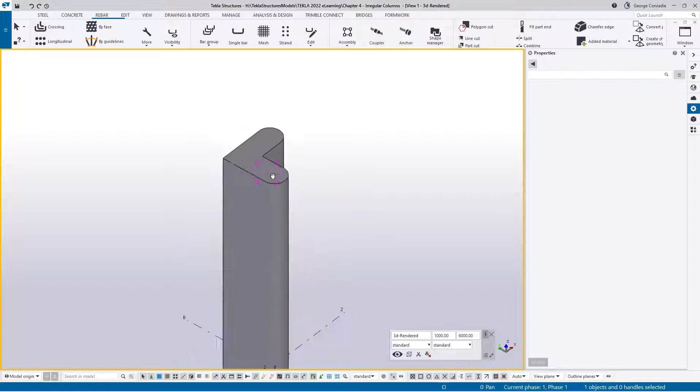In this video, I'd like to look at an L-shaped column, and the L-shaped column has got a bit of a circular shape to it. If we go to the top view, we can see that we've got a perfect end circle there and end circle there. So we can have a look at how we can detail this column.

So what I want to do before we start, we'll just get a little bit of a sketch here as per usual. And what the engineer is asking for, again, it looks like we've got N12s at 300 ligatures around, and then he's got L bars closing the gaps, from the outside to the inside, and from the inside here to the outside, and then he's got an L just wrapping around the outside, which are also N12s at

300. And then the main vertical bars, he's got a row of 5 bars here, 5 N24s. He's got 4 N24s on that side, obviously because we already have one in the corner. And then around the arch here, he's got 3 N24s, and it's similar here, 3 N24s. Again, we've got the traditional extension by 500 with a cog at top and bottom, and a crank lap at whatever level we can make, 1.5, 2 meters. All right, so knowing that, let's see how we can detail that column.

Now, also with this column, I'd like to show, let me just bring this back, in terms of this circular bar here, which really has a leg, a straight leg. It's got a perfect arch and another straight leg, and this perfect arch has got the leg length in the middle there should be 0 because it should be a perfect half circle. So let's see how we can achieve that.

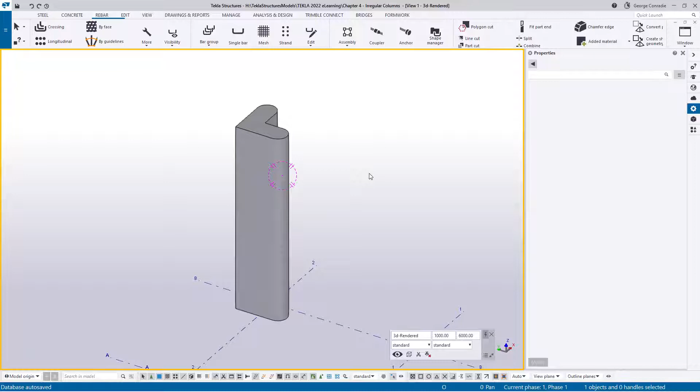And what I want to do is I want to show 2 methods. The one is I want to show how we do that with rebar groups, and then I want to show the other one as a rebar set and show that we can achieve exactly the same result. So they show up as a single line in the bending schedule with the same shape code, although they would detail 2 different methods. So that is the aim.

So when we head over to our level 0, which is at the bottom, I'll make sure we're in transparency mode. What I'll do is, as a starter, I'll do this one as a rebar group, and I'll do this one as a rebar set, and we see how they compare. Okay, so in our rebar tab, we go to rebar group. So we go to normal rebar group, and then let's go and look at settings.

So with that, what I'm going to do is I'm going to start drawing the bar. So first it asks for the part to reinforce. I'll pick the part and then take also the shape of the bar. Now, I need to get to a point on this side. So what I like to do to start, I want to start there and work my way around here. So that's going to be the first leg around here, and that's going to be the last leg.

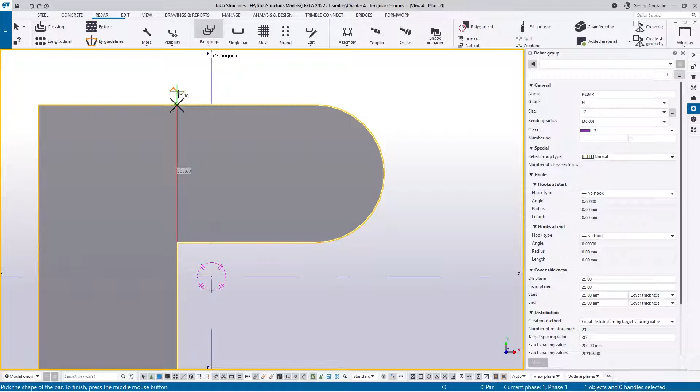So I start on this corner, but I'm holding my control key as a temporary snap. And then when I hover over to the other side and I accept a point there, you can see that's a red line, which implies that Tekla didn't see that as a leg. The physical start point is here now. And then if I hover and I just pull, make sure that you are in the ortho mode, you can see the 90-degree and the red coming up from the red axis.

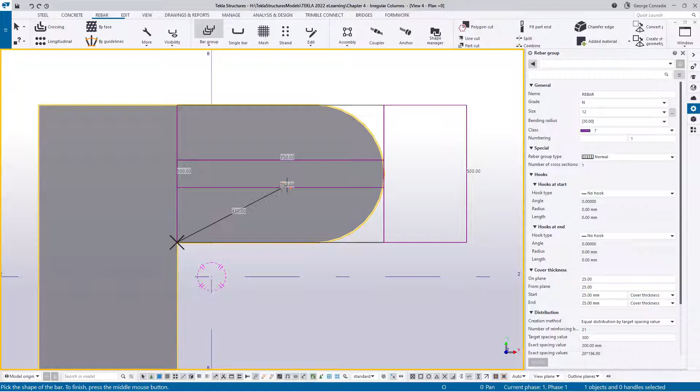I know that this length of this wall is 750. I can click, and I also know the width on this wall is 500. Click, and then back to our endpoint here. And once we're there, we can accept the shape. And now if I just tilt it over a bit, it's asking for a range.

So the start of the range, again, I like to start at the bottom and end at the top. With that, Tekla creates a U-bar that looks as follows. Now, if we look at this bar, we need to try and get around this concrete.

If we click on this bar, we can see Tekla's got a bending radius of 30 millimeters, and that applies to these 2 corners. Because there's only one value here, this field could be a list field, since there can be multiple values for every corner. But because there's only one value, Tekla applies that to all the corners.

Now, where does the 30 come from? If we go to our rebar catalog, it's this value specified in our rebar database, so it's picking up this value. If we had a tie or a stirrup, the radius would be slightly smaller.

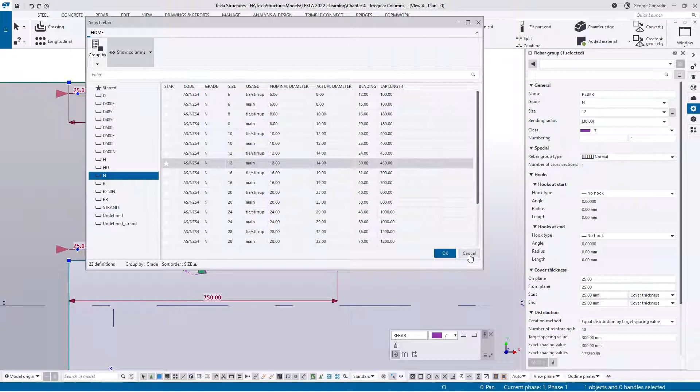Okay, so with that in mind, we know now that we can manipulate these radiuses. Now we've got to apply a radius such that we end up with a zero length leg. At the moment, if we look at this bar, if I just go click on there and go to the shape manager quickly.

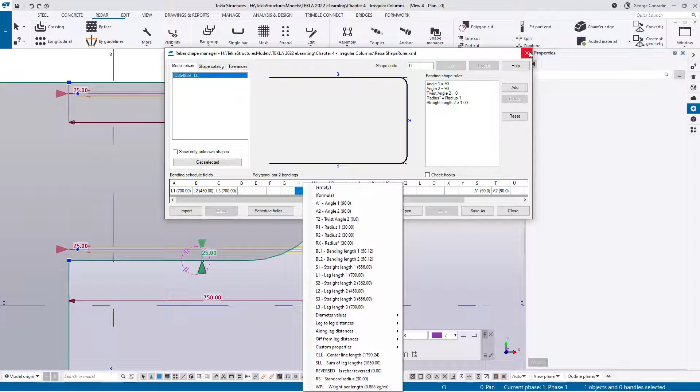If we click on this bar, we can see that leg 2 as it is there now. If I just go to short leg S2 straight length, there's a value there. So our aim is to hit a zero value there. So how do we work this out?

Now for that, I am going to call up my calculator so we can see how this is done. So what we know is, if I take a dimension from this end to this end and place it there, and also select the bar to see the other dimensions.

We know that we've got a concrete dimension of 500, and we also know that we've got a 25 cover top, 25 cover bottom. So those two together is 50. So if I minus 50, I've got 450. That is from the outside of this leg to the outside of this leg.

Now we also know from the catalog, although this is an N12 bar, the actual diameter is 14. So if we minus 14 for the leg on top, and minus 14 for the leg at the bottom, we end up at 422 millimeters, which is the dimension from the inside of this leg to the inside of that leg.

Now the radius would just be half of that. So if we divide by 2, we end up with a value of 211. Now what I will do is click on the bar, and in the bend radius, I'll replace that with a value of 211. And if I do that, Tekla then generates this perfectly shaped U for us.

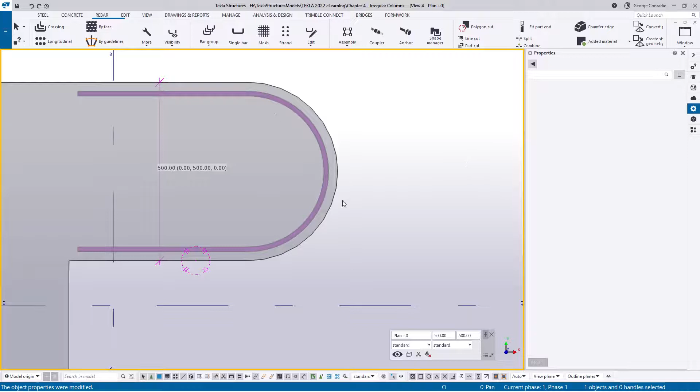And if we then click here and head over to our shape manager again, you can see it's now picked up a different shape that looks like this. And if we right click in our values here and look at our S2 value, we can see we've hit a perfect zero here, which implies this is a perfect half circle or arch with no straight length there.

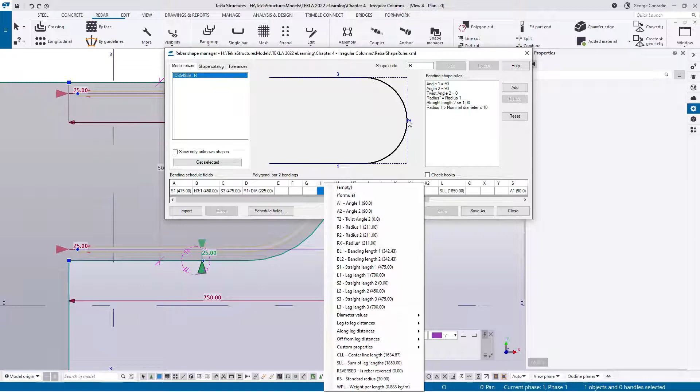And that's exactly what we try to achieve here. Also, because I started on this corner and I've got a start and end value of 25, I've got to try and hit that same leg length with our rebar sets now.

If we click on that bar and inquire the bar itself, you can see we're aiming for a 475 leg, which is the A dimension. And we've got a C dimension of 475, which is the bottom straight length. And then the 450 is the B dimension, which is from the outside here to the outside on top.

And then our radius is 211. Our outside radius to the outside of the bar is then 225. But I mean, you can define these shapes any which way you want.

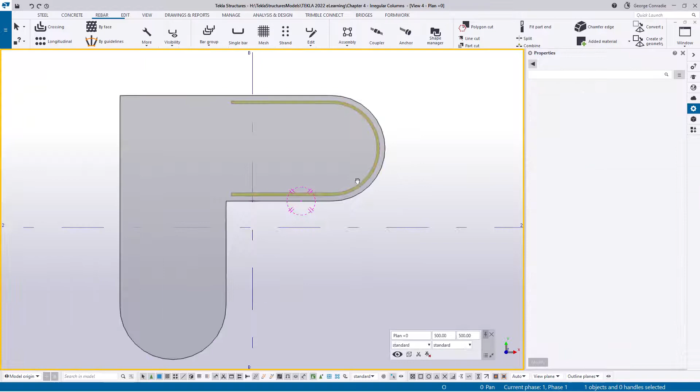Okay, so let's try and recreate this. But before we do, let's just look at our spacing quickly so that we can actually use it in the final result.

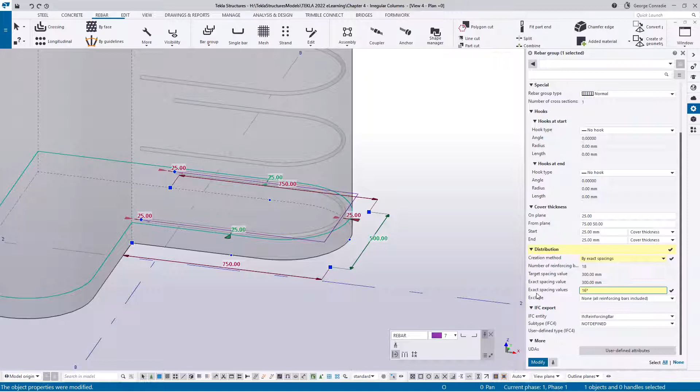So if I click here and go to our property pane again, we can say the from plane, which is the gap at the bottom and the gap at the top. We want 75 on the bottom traditionally and 50 on top, and we'll accept that. Then for our spacing, we go to an exact spacing, and we know from previous videos that we can use 16 at 300. If I enter that, we're back to our usual set out of 17 bars spaced exactly at 300. We've got a 75 at the bottom and a 75 at the top, although we've only asked to cover 50. Okay, now that sort of wraps up the rebar group.

So if we just click on the concrete column, right click and inquire the cast unit, what we now see, if we scroll down a bit, is we've got our bending schedule with a single line in it, and that single line calls up an R-shaped bar, and it also calls up 17 of them. So let's see how we can deal with that in rebar sets.

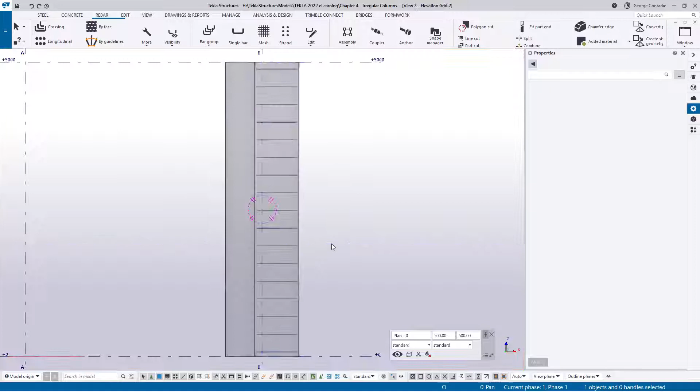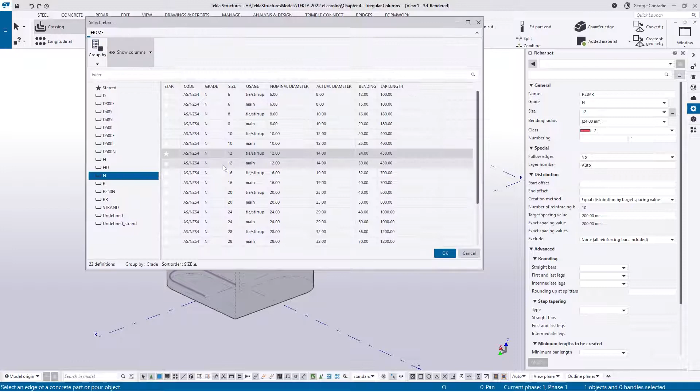So let's go back to our rendered view, which is this one. I'll make it transparent and redraw to make sure we get the right color. If we now go to a crossing bar, and head over to our property pane, we can then say, because I can see from the 24 it's got the wrong value, so if I hit that I'll say N12 as a main bar, because I'm looking for the 30, and then our color will go back to our traditional 5.

And then the rest of the values, except for the 300 target spacing, I'll pick. And then if I hover over this edge, what I'm going to do now is, instead of accepting all of it, I'm going to start, I want to accept that one, and I want to accept this one. And then what I can do is just pull this back a little bit, just to somewhere, and then say OK. And that will then give us the rebar sets in the same way.

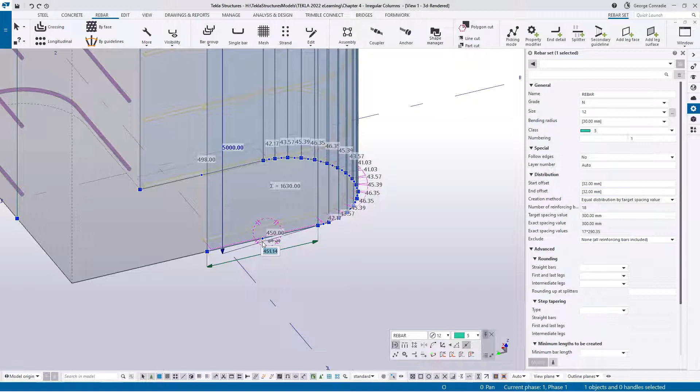And now the next thing we want to do is make sure our leg lengths are correct. An easy way to do that is you can see the face here is 450. We need to take this value and measure it from the correct side, this side. We want to make that 475 mils. And then we want to do the same on the other side, so this 500, we want to make 475. Now those bars will have exactly the same leg lengths.

Now all we need to do is look at the spacing vertically. So we know we want to start 75 at the bottom, and we also want to stop 50 at the top. Our creation method, we want to do the exact spacing again, and for the exact spacing values, it's 16 at 300. We can just say okay, we're happy with that. Now that generates exactly the same set.

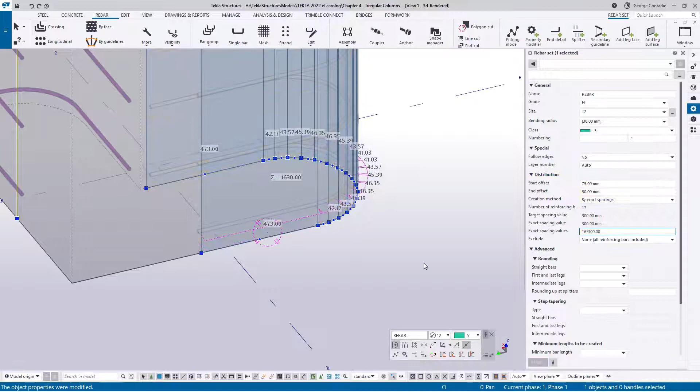Now, if we look at this bar, I'm going to click this rebar set, just to confirm it's a rebar set. And I'll switch off the visibility of the leg faces there. Then what I'll do is head over to the rebar shape manager, and it's picked up an R bar. But the difference here is we've got an arc there. You see this little green 2 here? It implies that Tekla has now picked that up as a rebar set as a perfect arc.

And if we go to our values, we can see there's an S1 straight value, and then we go down we get an S3. There is no S2, there is no leg. So Tekla has picked up that this is a perfect arc. And if we go and look at the radiuses, scrolling down a bit, we can see RI2, which is radius internal, is 211 millimeters. That's the same as what we calculated on our rebar groups, but rebar sets does it automatically for you. And then our outer radius is 224, which is what we defined as a D dimension on our rebar sets.

So with that in mind, what we can do is just close this, and we can then now go and look at our Inquire cast unit part again.

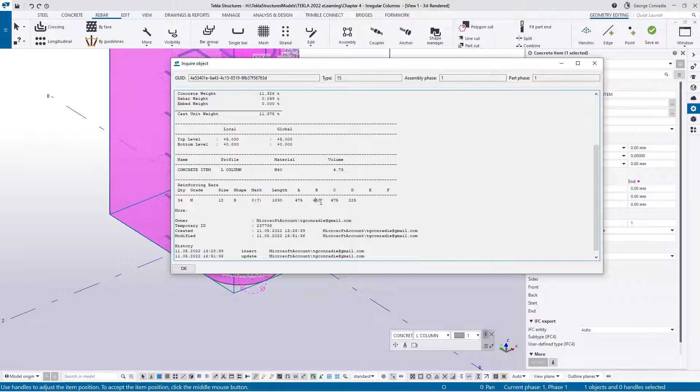And if we look at our schedule, we have one single line. We now have 17 times 2, which is 34. And look, the dimensions are exactly the same. So it's perfect. We've managed to achieve two different styles of detailing the same shape - one being rebar groups, and this one being rebar sets. So powerful stuff, and yes, you can do it in both styles.

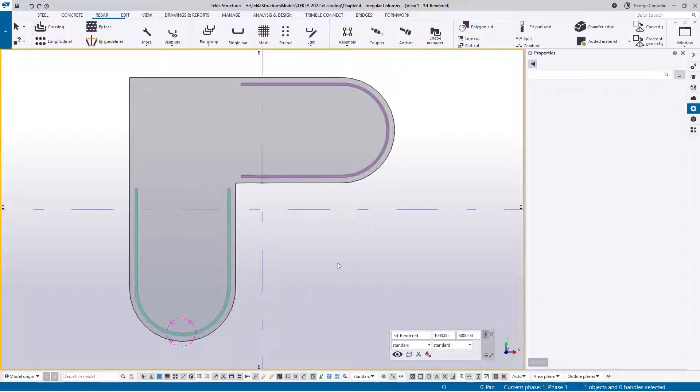So now while we're in that, I'll probably just continue with rebar sets because personally I prefer them and I think they're easier to work with. So what I'm going to do here, I'll start with the outside L bar. So we go crossing, and while we've got the settings all the same, I'm just going to hover over our shape and I want to pick this leg and that leg. And then I say OK, and that will generate those legs.

Now, because we have them in exactly the same spot and they were placed after this rebar set, Tekla will automatically give it to us on the inside. So what we can do is enable our leg visibility, and then on this leg, we can push this into layer 1. Okay, so that will be on top of that one.

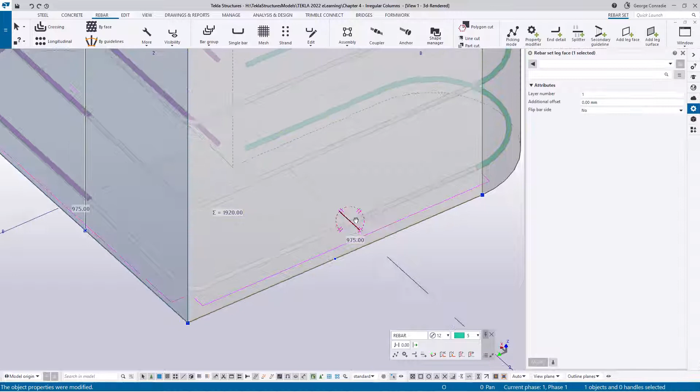We'll figure out the spacing now. Actually, let's fix up the spacing first. So we want to go one bar up. So if we look at our 75, if you add 14 to that, we're on 89. So if I say OK, you can see it lifts it up exactly above that bar.

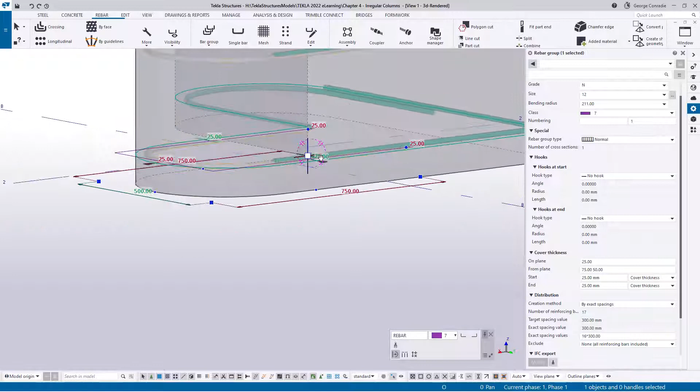Now this bar here, let's just have a look at what's happened here. If we look at this bar, I would have thought that should be lower. So the from plane is 75.

It's interesting. It looks like the way that the cover gets measured is a little bit different between rebar sets and rebar groups. So we'll just drop that one in the beginning a little bit. If we take off 7 mils, so if we aim for say 68, just drop it a little bit - that's half the bar diameter. So it looks like it's measuring to the outside of the bar on the groups and it's measuring to the center in terms of the set. So it doesn't matter, as long as we can figure it out, it's cool.

So what we can do now is ensure that we've got consistent leg lengths on these. We can force a leg length on the rebar set. So if we click on the bar, we can then go over to our end detail, and for our end detail, make sure we load our standards in case we've made any settings we didn't want.

So if we go down here, in terms of our hook, we don't want a hook, so we can just say no hook. But what we do want is an adjustment type on the length, and the adjustment type is a leg length, and we want to specify a hard-coded 950 millimeters.

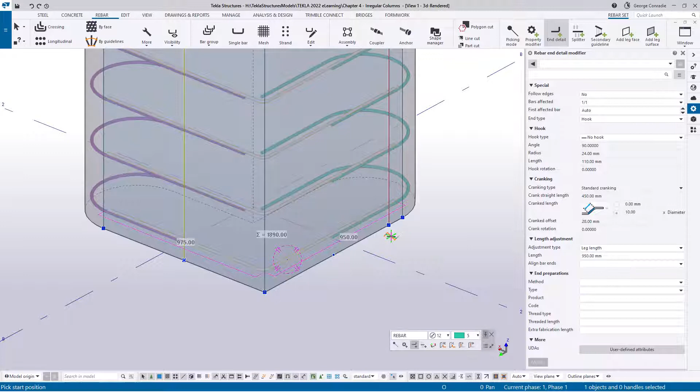So now if we hover over that leg, make sure if you hover over here and it doesn't light up, you've got to look at your picking mode. So if we just go back to our single pick mode, we will get our line. And if we now click, and on this side click as well, it's adjusted that to a leg length. And if we look at the bar, right click, inquire, we have a perfect 950 by 950 leg length forced.

Okay, so that wraps up the outside L. Now the inside L, let's just get our picture back here. On the inside L, we're going from the inside all the way across to the outside. And again, yeah, from the inside all the way across to the outside. So let's see how it's done.

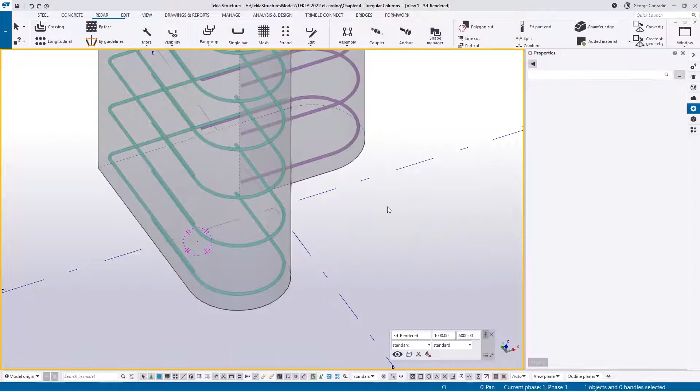So what I'd like to do on these, I normally go to my ground floor, which is level 0. And in here, I'll start with one of them. For instance, I'll use the More tab, and I say I want a point input. Make sure it's linear, and then just check my values. That's all right, and we'll just leave that there at the moment and see where we get to.

And then what I'll do is pick a point there all the way to the outside, and then to the next snap mode there, and I say okay, I'm happy with that. And then in terms of our spacing, again, we can just start at the bottom, head up all the way to the top, and we get our rebar sets created.

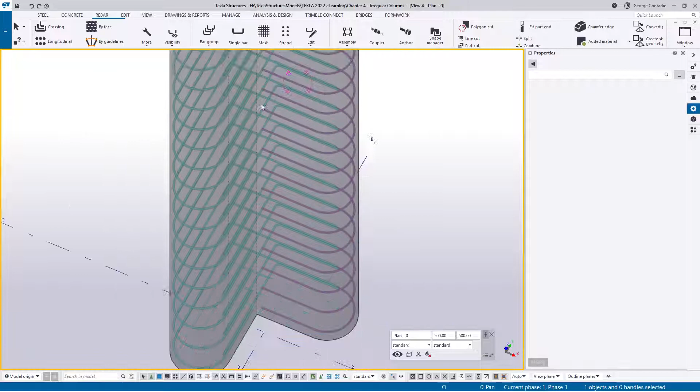Now let's see quickly what's happened in terms of our spacing. First of all, again, because this bar was put in before that bar, that one gets the next layer up. So if we click on the face and we just force this back to our first layer, Tekla then will kindly give us those 2 bars on top.

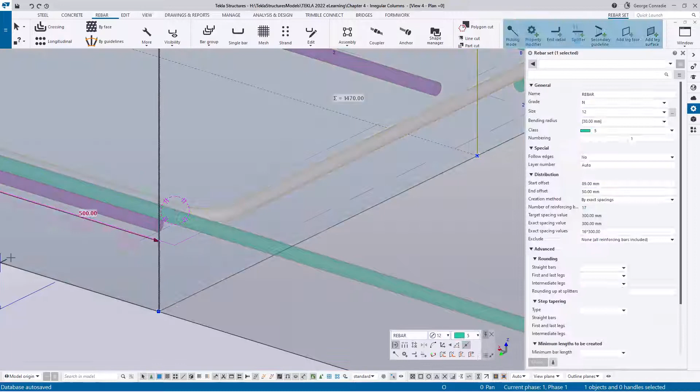Now on this other end, on the outside here, we do have an issue. We need to bring that all the way back. So if we look at this, it's in phase 2. We can make this phase 1. So it brings it back to where we want it, but also we need to elevate it. We need to push it up a little bit.

So what we can do with that bar is, if we click on the bar itself, let me just click on the bar, and we look at our spacing. If we add another bar diameter, which is 14, remember, always work with actuals when you work with spacing and with clash detection. If we make that 103 mils, which is another 14 mils, it puts it exactly on top of the other bar. So it's perfect.

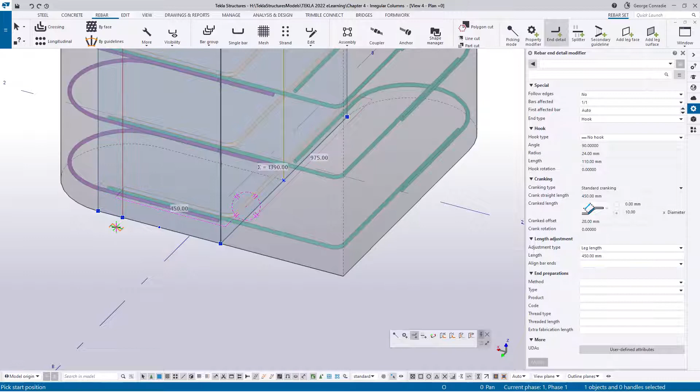And now the only thing is we need to control these leg lengths a bit. So if I click on the bar and I go over to my end modifier, and again, I don't want a hook, but I do want a special leg. I can say on this leg, I want to guarantee a 450 leg. So I can then hover over this one. That will pull that leg back. And on the other one, I want my 950 again. So if I say 950 and I hover over this leg, I will get to 950.

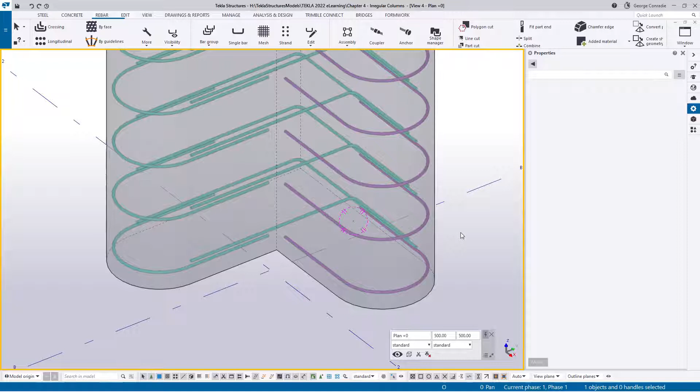Now, if we just look at what's happened, if we click on that bar and we say right click, inquire, we can now see we've got a 450 and a 950 leg, which is exactly what we wanted. So with that in mind, we don't have to redo that bar. What we can do now is we can click this bar. As long as we're in the XY and we're flat, we can click on the bar and say right click, copy special, mirror, and then mirror about this symmetrical line over here. And if we then say copy, it generates the exact same bar for us on the other side.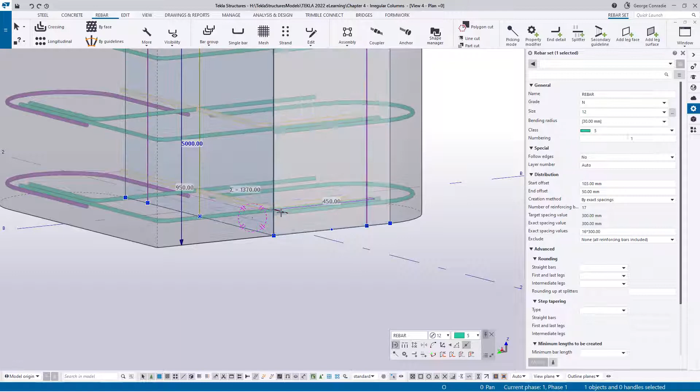And all we need to do now is just look at if we can avoid clashes. Now, we've got a couple of layers going on here. If we move it one down to miss that bar, we're going to clash with this bar. If we move it another one down, it's going to clash with this bar and with that bar. So what we can do is we can either push this right up another 14 mils, or we can drop it to below. Now we know that the one below is a 75. So if we make this 61, drop it one diameter down, that should slot us in right at the bottom. So there we go. This is working out really, really nice.

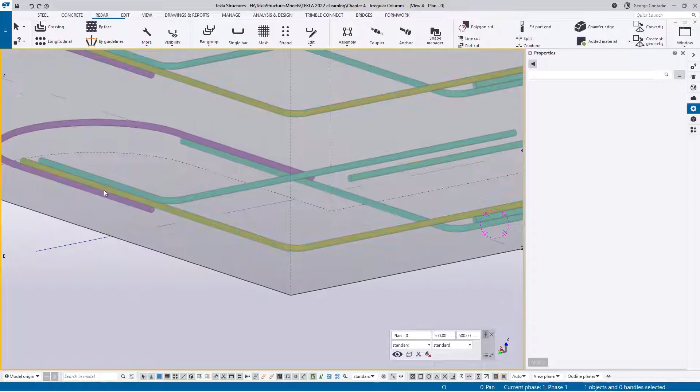Now, if we look at these, they lap perfectly and they're all in the same plane. These lap perfectly in the same plane. That laps perfectly. So the only gap we have is these two, but that's unavoidable. There's nothing you can do. So they'll probably just tie these to the vertical bars instead. Unless you just slope it down or whatever, they'll probably do that on site anyway. They don't work with water levels when they fix these reinforcements. So it's probably going to end up where it ends up. But in terms of detailing, this is as good as it's going to get.

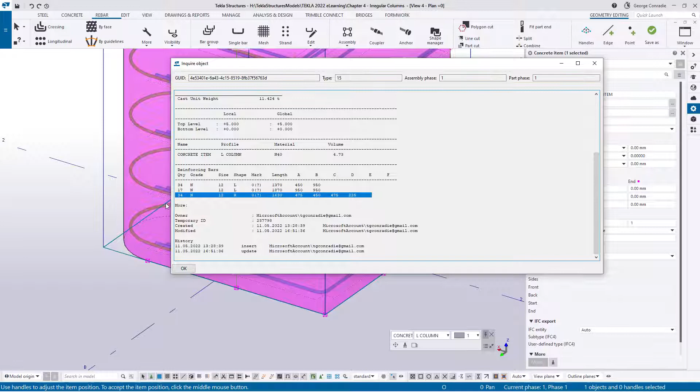Now that we've done that, we can have a look at our bending schedule one more time. If we go inquire cast unit, we can see that, although we've added a lot of bars, we've got 2 types of L. The one we've duplicated has duplicated the value, so it's got 34. The special one on the outside is a 17. You see the one with the 2 equal legs of 950, and then we have those rounded ones that are again 34. So it's going pretty good at the moment.

So let's move on to the verticals, and what I'll do is I'll do this side first. So if we go crossing bar, rebar sets obviously, and let's pick a, the engineer is asking for an N24 it seems.

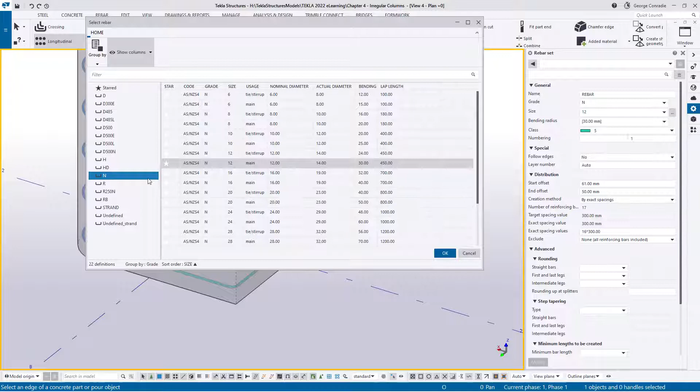So if I go N and I go 24 as a main bar and I say okay, and then again traditionally we'll pick our class 4, which is the blue color, and the offsets I'm just going to remove them for now. And the exact spacing is calling for a number, and the number it's calling for is 5, and the rest can remain. So what I'll do is just hover over the section again, and I pick this.

I can also pick this one because, well, let's only pick this one because then what we can do is we can finish the bar off with our end modifiers and our splitter and just copy it or mirror it to the side. So what we can do now is say, okay, we're happy with that. Let's create it. So that will create the bars nicely.

And because it's a rebar set, Tekla is aware of the layering. So it puts it on the next layer for us. And that works out really, really nice. So what we can do now is if we click on this bar, we can see the brackets here. Although the start is 0, the start's on that side. You see the arrow? Tekla's picked the start on that side. So there it's 0 because it's nicely where the arch meets the straight leg part, which is correct.

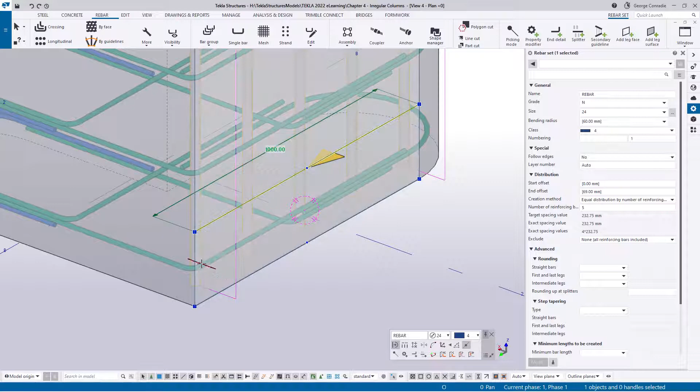And on the end here, which is this value here, it's picked up 69. So it's again calculated it based on what that bar's diameter is and this radius, and it's picked up the exact value. So with that in mind, what we can do now is we can say, okay, let's manipulate this quickly. Click on the bar, and I'll switch off the leg faces for a minute. Then just make sure we select the bar.

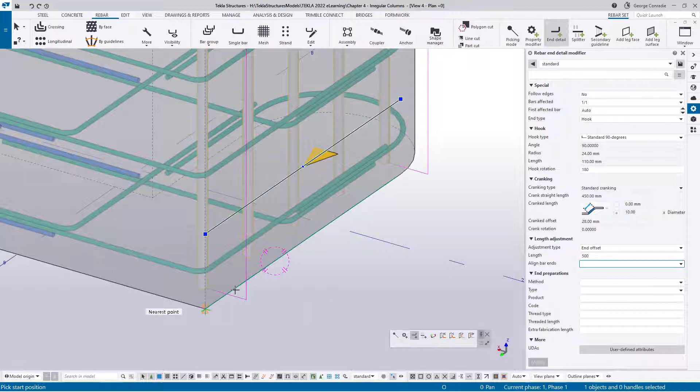I'm going to go to end detail and I'm going to load my defaults because I made some adjustments. I do want a 90 degree, and we know because this is the face, the 90 degree is going to point inward. So we're going to change this to 180 degrees so we can point outwards. And then for the adjustment type, we're going to do an offset, and the offset is going to be 500 like before. And now we can just hover over the edge here and apply the value, and just like that, it's now got the hook for us.

Now, while we've got that setting, we might as well just go and add it to the top as well because it's the same on the top. And that pretty much sorts out that one for us. The next thing we want to do is just introduce the crank splitter. So what we can do is click the bar, head over to our splitter, load our defaults just to make sure we haven't screwed up anything. And then under the split type, we want the crank.

And also, depending on which direction Tekla is going to pick, we will have to come and adjust the crank side. But let's assume Tekla is going to apply what it's doing here. With the length, we want this lap to be on the left hand side of the line. So let's keep that. Now, if I hover over here, we can see there's not much happening, oh, there we go. I've just got to hover over a bar.

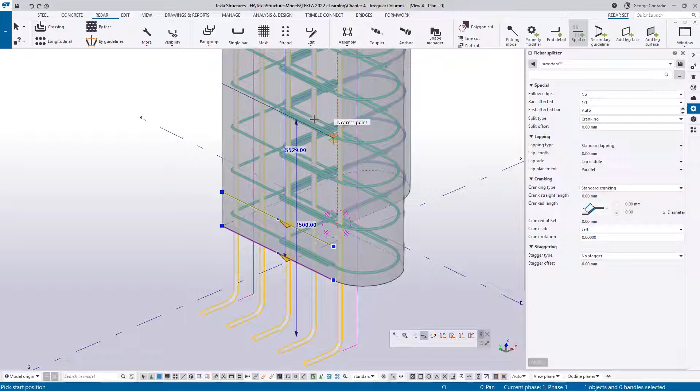So let's pick a value of, let's say, 1.5 meters. It seems reasonable. And that will then split and crank the bar correctly for us. Now, just based on what Tekla automatically did with these two, I assumed it's going to do the same with that, and our suspicion was correct, and therefore we could pick the left-hand side correctly for this. If we click on that and look at the direction of the line,

the lap is on the left. Okay, so that sort of works out, but if I just look at that, it's poking out the bottom. So maybe the 1.5 that we picked isn't good enough. So what we can do is pick that and just drag it up until that blue line reflects 2 meters.

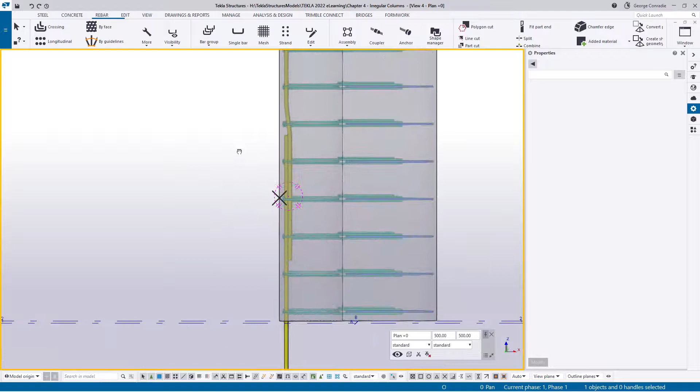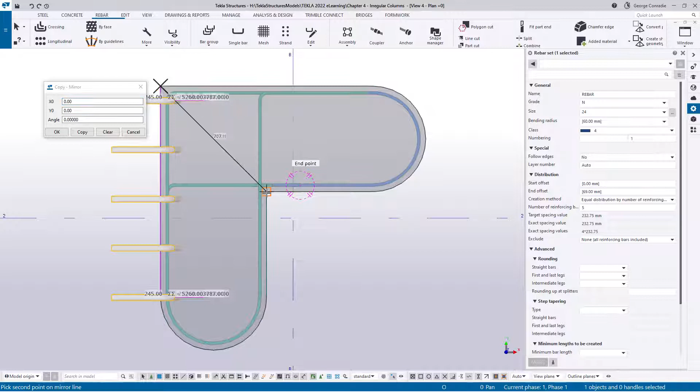And there it is. So with that, it now moves the lap up, and that's probably a more reasonable assumption. Okay, so with that, what we can do now is we can mirror that about this. So if I say Control P to make sure that we're in a plan view, we can click on these bars and then right click and say copy, and we can say mirror, and we know that our symmetrical line would be this 45-degree line. And we say copy, and we get those bars replicated on the other side.

Now, two things here. The one is because it's picked up that bar, it's moving it again to another level. Actually, no, that's not what's happening. What's happening is, again, with the mirror, it's changed this line direction. So what we can do is we can just flip it around. So it reverses that. And then an interesting trick that Tekla's got is that if you look at these, because we did a copy mirror operation, we're now replicating this.

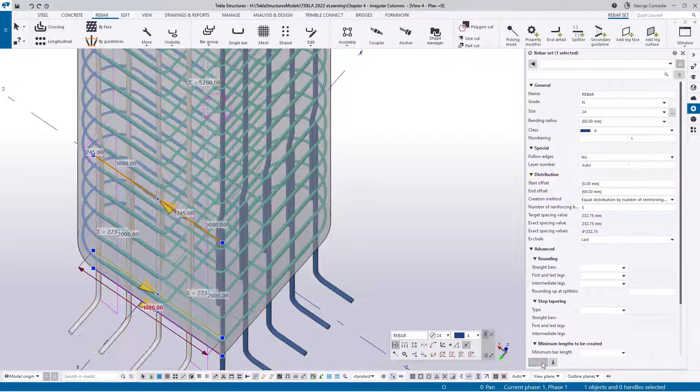So what we can do is we can click on this. And if we look at our spacing lines, where's our spacing lines? This one, yeah. We can say we don't want this end bar. So if we hover over to the exclude tab, we can say exclude the last bar. And if I say OK, you can see Tekla now kindly omits the last bar without affecting any of those. And if we look at this and we do inquire, we can see it's only generated 4 bars for us. So that's the correct number as well.

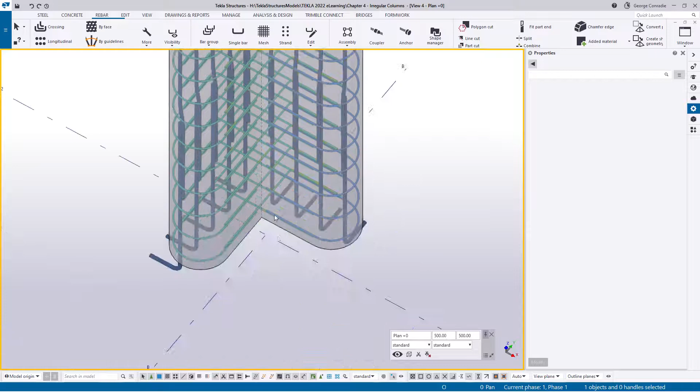All right, so with that done, we can then move on to the internals, which is a very similar exercise. Again, longitudinal bars. We've got all the right values except for the number; the engineer is calling for 3, and let's just not exclude anything at this moment. And then if I hover over this end, I can pick those 2 inner legs. Well, let me pick the one and mirror it, because then we can do the changes to the end property modifier. So it's 90 degrees, 180 offset 100.

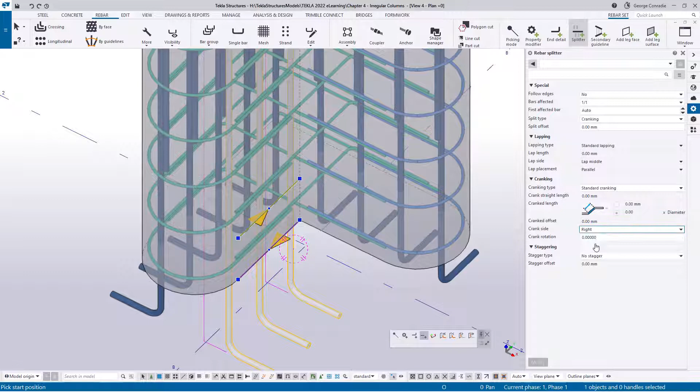So we can just pick this edge. That's adjusted. We can also pick the top edge. That's adjusted. And now what we can do is we can create a splitter. So if I click on this bar and say give me a splitter, and the splitter has got to be on the right, because I just look at what it's doing there, although it's doing the opposite there, so we don't know what's going to happen here. But let's just try and see. I've got to try and pick up the bar.

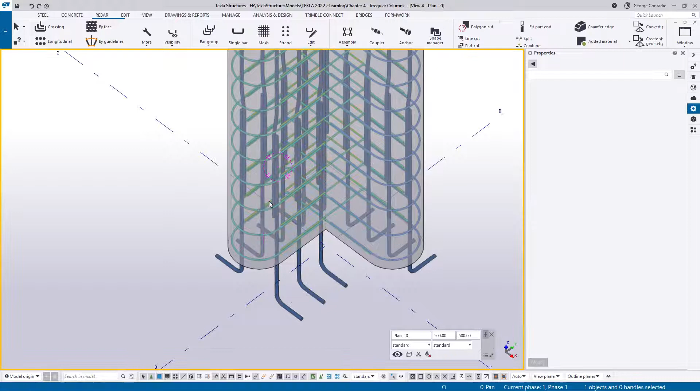So there's 1600, 850, 1900, 2 meters. So that's the split. So in that case, it's picked the same direction as we thought, so it's split it in the right place. So that's pretty cool. So that completes that bar. And now what we can do is we can grab this bar and say copy mirror about our symmetrical line again. Just got to make sure that I actually get the right line. There it is, copy. And that pretty much fixes that up for us.

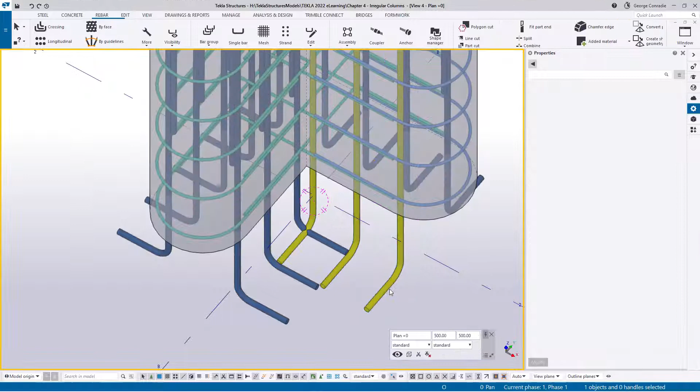Now again, in this we have those clashes here. So what we can do, in this splitter, we can say instead of 500, we can go to our 468 again. Actually, that's not correct. Let's try and calculate this correctly. If we look at this bar, it's a 24 bar. So the outside diameter of a 24 bar is 29. So if we take 29 off our property modifier, it's 471. So if we go 471, okay, it will miss the bars there. You can see it's perfectly sitting on top.

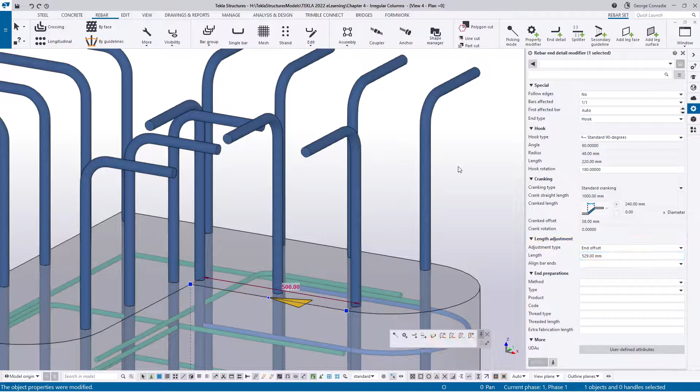And now to miss it on the top as well, we've got to click on the bar, click on this end modifier and just add the 29 there, so it's 529. Okay, and it just wraps it up the top. So that's pretty much kept these bars the same, but we also need to check the position of the split, because now with that extension, it's mirrored it. So the first thing is just swap the lines around. If we now look at the extension, we can see that that leg has changed a little bit. It's 271. So we grab this and just move up a little bit.

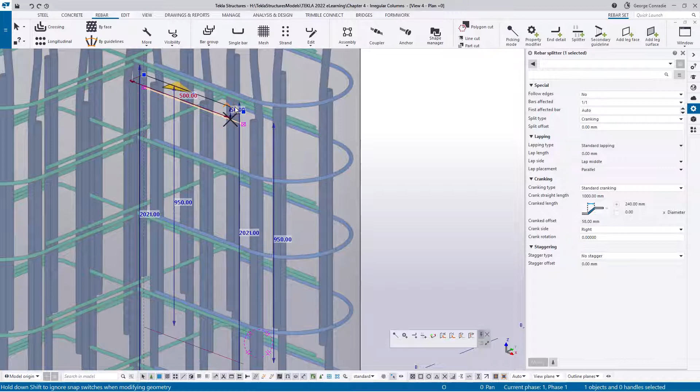Now, if you're getting funny rounded dimensions here, what you could do is you could also hold in your shift key and you'll get rounded dimensions. So what are we looking for? Maybe zoom up here. So that's going to be 21. So we need to come down.

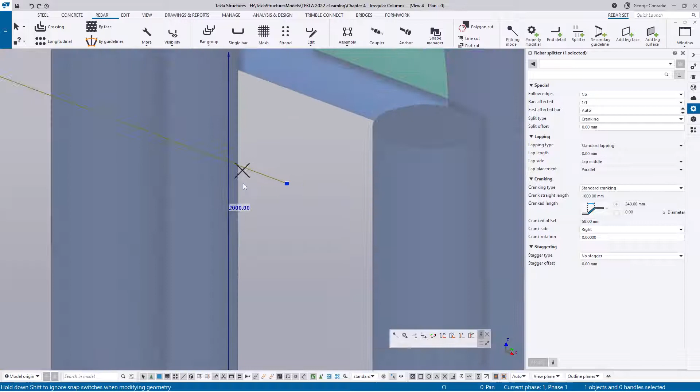And if we zoom in a bit more, we could possibly get that 1 millimeter down as well. Let's see if we can be pedantic about this and actually, oh, there we go. That's exactly 2 meters now. Look at that. So, okay, with that in mind, what we've done now is you can see the splice has moved up a little bit. And the reason for the move up is because we're going on top here. So we're basically just moving the whole lot up.

And theoretically speaking now, if I click on this and I go right click and I go inquire cast unit, we have not increased the number of bars. We do have an L with a 2000 and 399 leg for some reason, and then the others are obviously 12 bars. But the point here is that it looks like we've got all our bars, which is 15 of them, which is the verticals all in one line.

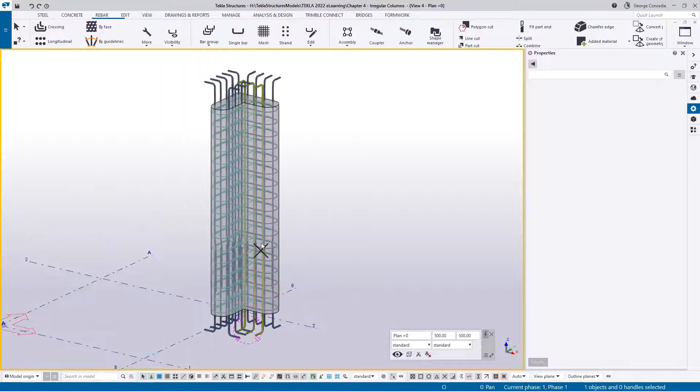So if we look at that, let's just do a summary here. We've got 5 bars there, we've got 6 bars here, which gives us 11, and then we've got another 4 there, which is the 15. So that way we keep the number of lines in the bending schedule to a minimum. So having done that, what we can do now is focus on these circular bars.

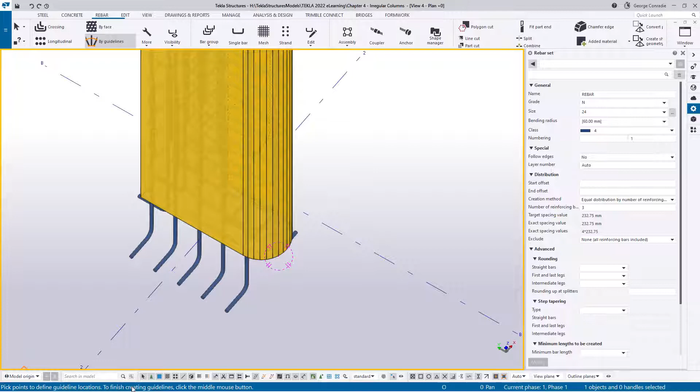Now they're very easy. The way I would approach this is just to use the guideline again. If we go guideline and we make sure that our values are correct, and it's 3 bars, okay, everything is correct. Now I've got to pick a face, and I pick that face, middle mouse button, and then Tekla is asking for our guideline. And with the guidelines, I like to start at the top, so I'll pick this edge and just make sure that I end at the right edge.

So if I just try and rotate around here, I want to end at this edge here, middle mouse, and I want to do the same at the bottom. So I start at this edge and I go around and I end at this edge. And I'll middle mouse, so it creates the bar.

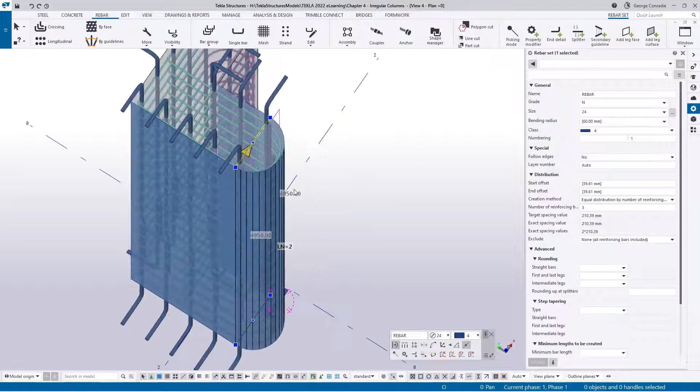The reason I'm doing that is, if you click on this bar, and I'll also switch on the rebar visibility leg faces, although it's picked all of this as a leg face, the spacing line only goes from here to this. So it's only going to put bars into this zone. And at the moment the bars look pretty silly, because we need to apply a follow command. So if we click on this spacing modifier, we go down to follow.

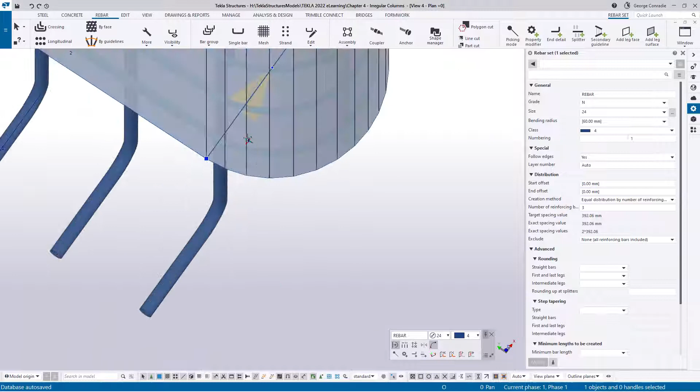It will then follow the arc first. And if we go down the bottom and apply it to this spacing as well, follow, it follows the arc. And now, if we go into a view, we then have the 3 bars. So we can see there's one, there's one there, there's one there. Now we've asked for 3 bars going from there to there, and we have a 0 start offset.

So if we change the offset and we add 150 mils to the start and 150 mils to the end, it should move this bar 150 up and this one 150 up. And if we say modify, that gives us the outcome. Now, because this is a guideline, you've got to do the same at the bottom, because it's now applied to that guideline. And if we go down the bottom and click on this guideline, you'll see again it's got

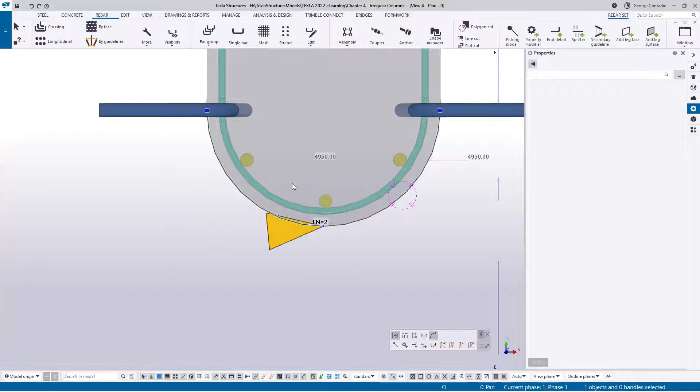different values. So in here we do 150 here, and we also do 150 here, and now we have those bars perfectly formed around that radius. So if we look at that, we've got our 1, 2, 3 bars with our flow line, and it's exactly what we want. The next thing we can do is to just add our property modifier.

So if we click on this bar, and I'll switch off the face because we don't need it anymore. If we click on this bar, we can go end modifier, and again we want a 90 degree, 180 with an end, and we can go back to our 500 because that's not going to clash with anything. And now if I pick, you'll see nothing happens if you sort of hover over it.

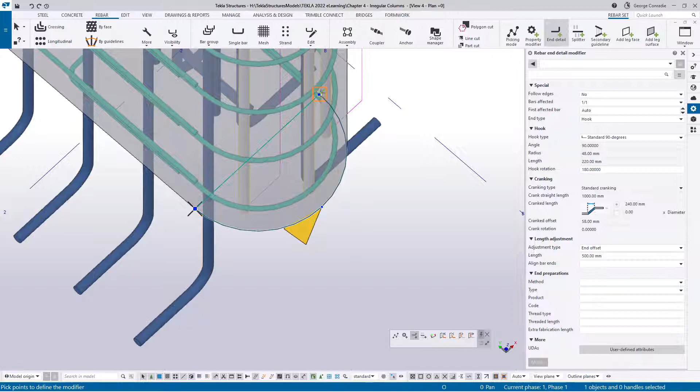We've got to pick our point mode, and we pick this edge to that edge, and we say accept, and make sure if we click on this that we apply the flow so it goes around. So then these get fanned out 90 degrees exactly, and we can do the same in the top. So if we go into the top, we can apply our end modifier from this edge to this edge, middle mouse, and that applies it.

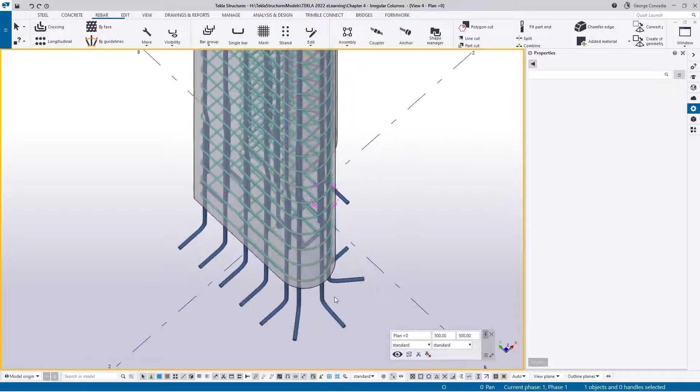Now you can see it looks all funny, and as soon as we click on that and say apply to the flow, it looks much better. So if we look at Control P, that's given us the desired result. Now this won't always be 90 degrees. It just depends on how it works out the spacing. You could get it there, but for the sake of speed and outcome, it's not going to change your bending schedule. It's probably not worth trying to achieve that. You're just going to play around with numbers all the time, so just leave it like that.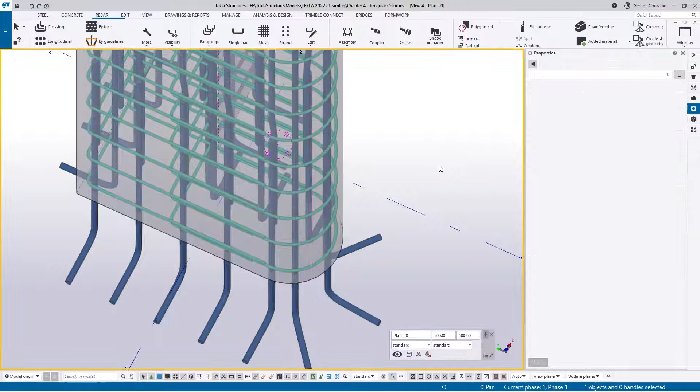Okay, so all we need to do now is add the splitter. Now the splitter again is a bit of an issue, so let's see how we're going to deal with that. Again, in this regard, we don't have a point to snap to. If we click on it and we go splitter and we make sure that we're in single point mode, we can see it doesn't follow the bar because it's a guided face. So again, I'll do like I did in our first video on columns with the tapered columns.

I'll create a plane. So if I go to edit, construction plane, plane. Make sure that my snap to any position is on, and I'm working in a plan view 0. What I can do then is just quickly draw a work plane that I'll need here, 2.2, and then middle mouse. And again, just for a refresh, if you don't see the plane, make sure that you've actually got your construction planes set to visible. And secondly, if you can't select them, make sure that down the bottom here with select planes, you've got it enabled.

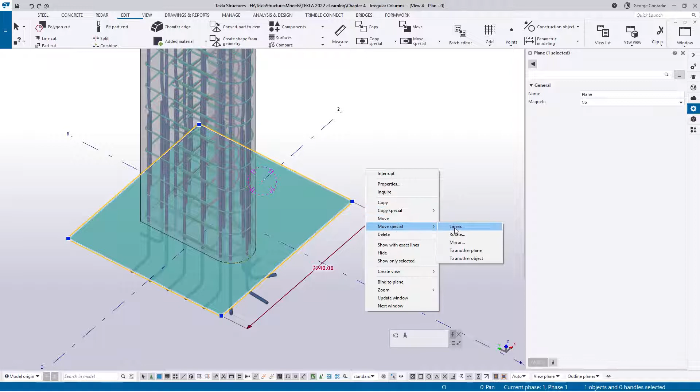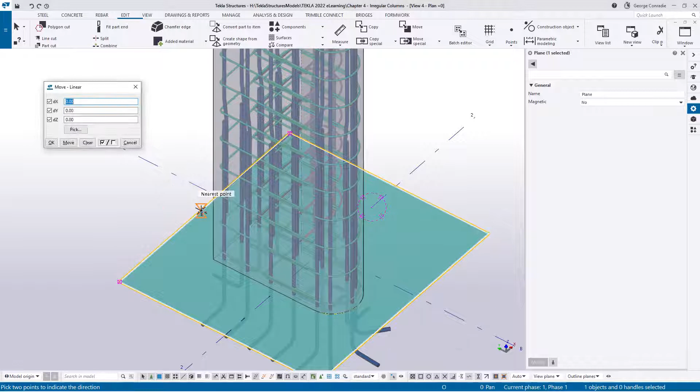Now that we can pick those, we can say right click and we can say move special linear, and we want to add it to the others, which is like, actually we want to hit the top of that bar, so let's just cancel out of that. What we want to do is we want to meet this, and because we've got 2 meters on the total length, I don't know what's left. Yeah, so it should be about 1.5 meters, but what we can do is we can say move linear and then pick this point and then pick the top of the bar, and it will work out exactly what we need. All we need to do is 0 the X and the Y, and if we then say move, that plane will now be moved.

And the reason we don't see it is because, if I could just put on my visualization, this is our scope of what we can see in this model. So if I clear that out and we go back to our 3D rendered mode, we can see it's now placed that exactly on top where we want to cut. These will be a bit higher because of the fact that we've pushed these bars up, remember, but the others are all on the same level.

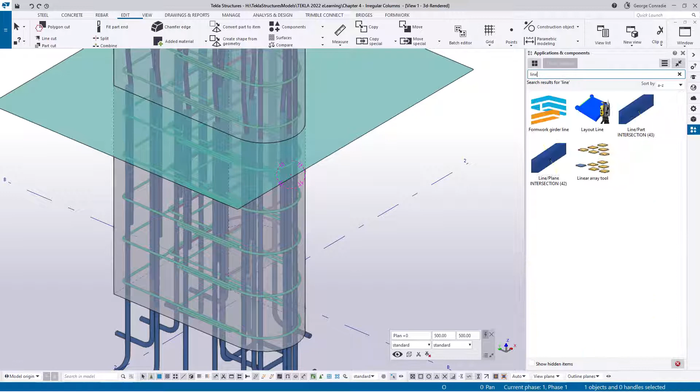So, okay, with that, what we can do now again is go over to our applications components. In there, we can type line, and then we can use this component. So if I click that component, the way it works, it wants a vector. So if I pick a direction, and the direction would be from here, make sure that we pick our blue axis, make sure it's blue to there.

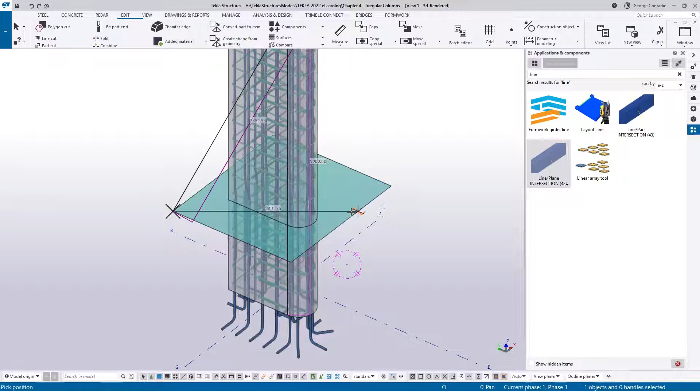And now that it's got the vector, we need to give it the 3 points on the plane. So if we pick that point, and we pick the back point there, it will then, obviously the first time a component runs, it takes a bit longer because it's got to be loaded into memory.

While I'm in the command, I might as well do the other edge as well. So if we go down here, make sure we got that edge. And then all the way to the top, make sure that we've got our blue ortho, and then pick that point. And now that we've got the vector again, we can just pick out 3 corners of our plane.

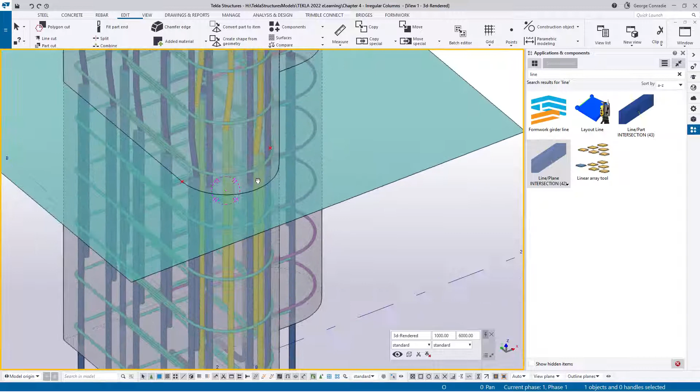And then what we can actually, before I do that, I need another one in the front because a splitter can't follow an edge. There is no edge to follow here, so we need at least 3 points, and then we can change the node of that point to a tangential arc.

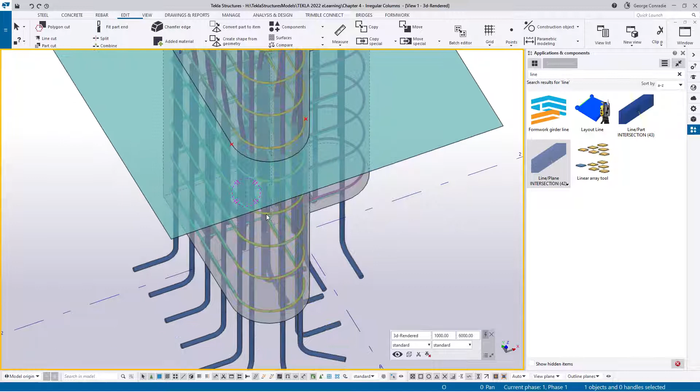So what we can do then is to say we need another line that goes from this point here, and make sure that we have our blue axis. Where's the ortho? There's the ortho, and just move down till we get the point there, and then again just pick our 3 corners of our plane.

It generates the third one that we want here. So okay, now we don't need the plane anymore. We can delete it, and we've got our 3 points.

So what we can do now is finally pick our bars, add a splitter, make sure that we see our property pane, and in the splitter we're going to go around this way, so we want it to be on the right hand side, which is correct.

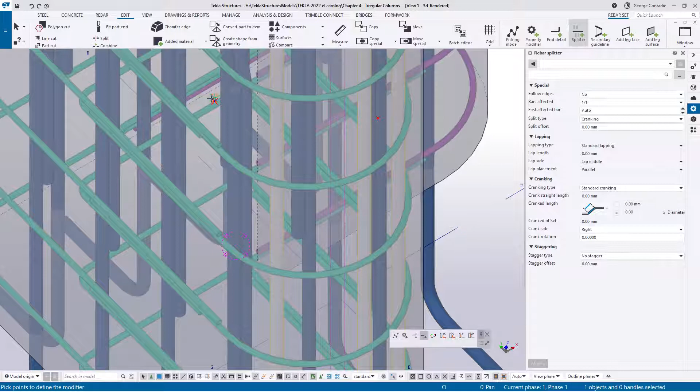So if I click this point, oh, we've got to be in point mode, I beg your pardon. So if we click that in point mode, we can click this point, and then that point, and then lastly that point, and say middle mouse, we can get our splitter.

It splits the bars, as you can see there. And now just to get this to flow around like the others, because if you click on this line now, there is actually a flow. If we do flow, but it can't flow. Why won't it flow? Because there's no edge there.

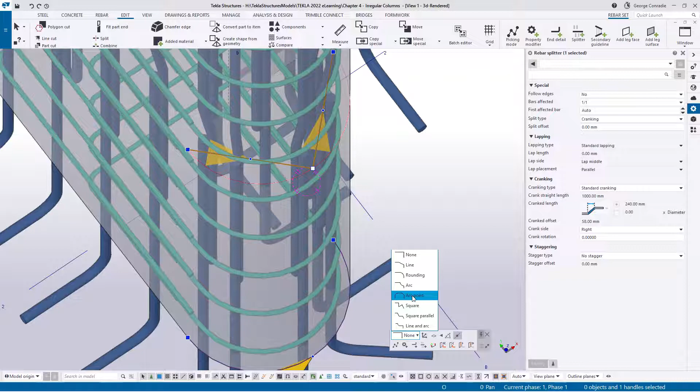So to get the same result, we can click on this node, and then we can change the rounding of the node to an arc point. And if we do that, we get the same result as a flow. And now we can see how nicely it's split these bars with a crank around that nose. Quite a complicated process, but same result again.

So what we can do now that we have that, we can pick this bar and we can say right click. And again, if you can't right click, go and look at your selections at the bottom. Now we've got groups because I selected the bottom.

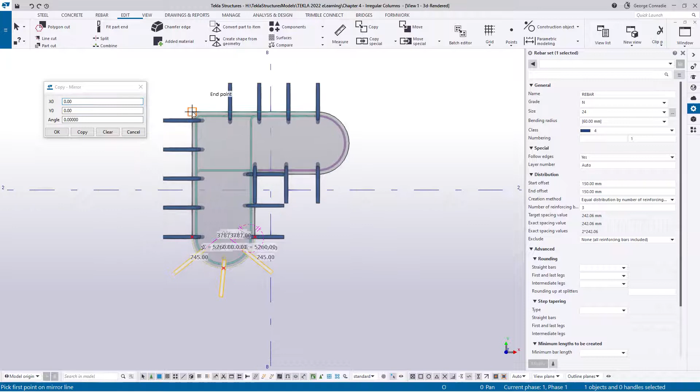So if I go back to rebar sets, click on these, right click, copy special mirror, and we'll use our intersection here again. Copy, and that will give us a group of bars over here replicated.

And again, because we mirror, we've got to look at our direction of our line. So if we click on this, we can just swap the flow and it fixes up our cranks to the right direction.

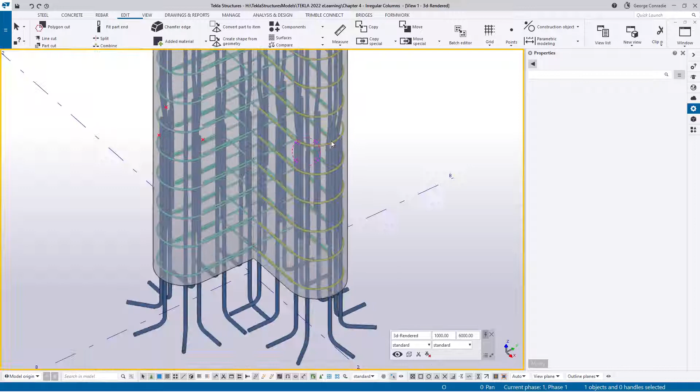Now that pretty much completes the exercise. We've done it all. It was interesting for me. I hope you guys learned something.

I think there's benefits to using rebar sets in terms of layering and working with end modifiers and rotating bars that you don't normally have with rebar groups. I mean, if you look at a rebar group, you can rotate the hook, but you can't rotate the bar itself. Where with rebar sets you can do a lot of magic, but the rebar groups has their place too. Like for instance, in this bar, it was really interesting to create this with the rebar group and get the same result as the rebar set.

So you can pick which method you want to use, whatever you are detailing, and I'm sure you'll come up with a very optimized way. I hope you enjoyed that, and see you in the next video.